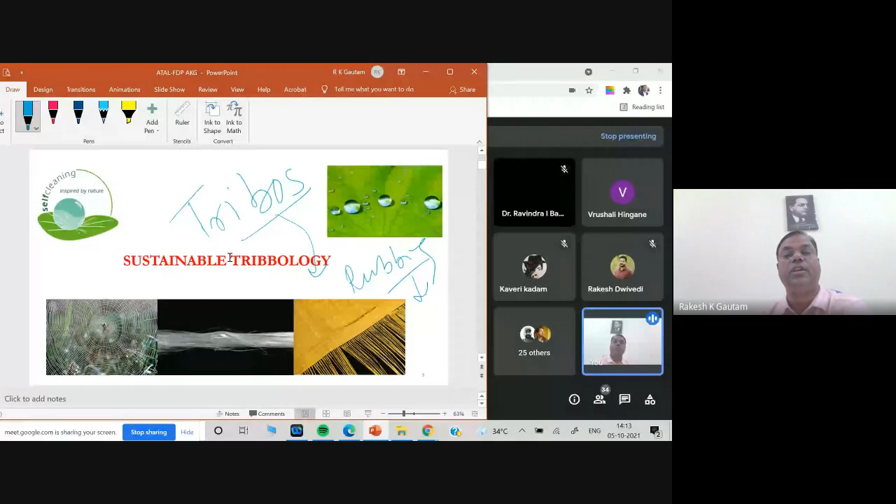Before starting sustainable tribology - why is this term sustainable used for us? Why are we more concerned about sustainability nowadays? Everybody is talking about sustainability, not just in one topic. For example, I am working in composite materials - what kinds of composites can we develop that can be sustained in our environment and used in our general life? So why is this kind of sustainability required?

The first and most important thing is energy, because a lot of energy is required to run this universe. So how much energy do we require to run this universe? There are several kinds of things and objects that can be sustained in our general day-to-day life. Energy is required for every moment of life. I'm talking because I have energy, and I can talk for 2 hours because I have energy. So from where can I get this energy, so I can keep myself fresh and talk in a similar manner for 2 hours? We have to record the energy.

Nowadays we are talking not only in terms of economics, but in terms of economic, social, and environmental dimensions of human development. So not only energy - suppose we can make an alternative fuel. At the place of petrol, we can use hydrogen gas. How can we derive hydrogen gas? How will it be useful to our environment, and how will it be useful to human development? This is sustainability.

Energy services are essentially input to our economic activities while improving living conditions and environmental quality. We will not see only if our GDP is increasing, but the condition of the people is going to the worst. So there is no use of a high GDP if the country's condition worsens. This is very much required - how we can contribute to social development through education and public health, and help meet basic human needs like food and shelter.

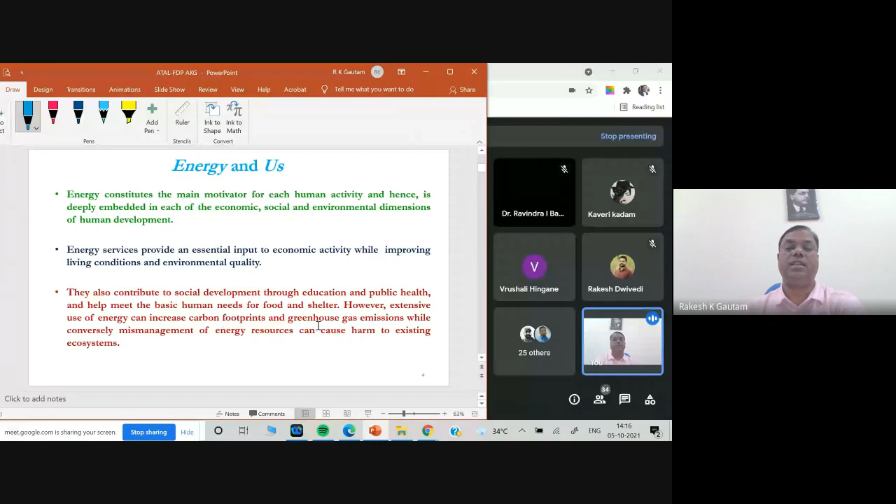However, extensive use of energy - one important thing besides social and environmental dimensions - is that extensive use of energy can increase carbon footprint and greenhouse gas emissions, while conversely mismanagement of energy is a problem too. It is not our purpose only to increase the resource of energy; we also have to control this energy. Suppose excess energy also creates emissions like carbon footprints and greenhouse gases. We have to take all this into account.

So what kinds of gaps are there? In environmental and human development issues, a lot of gaps exist - either in terms of studies or in terms of awareness. It may be of several kinds. So how can we bridge this gap between our desire for energy and the adverse environmental effects produced by our designing? How can we do it?

Particular kinds of designing are very important - how we can design particular components or particular kinds of equipment, all these things are very important. Designing machines that can still meet societal needs while substantially reducing our dependence on fossil fuels and energies. We can develop such kinds of designs which can be used for reducing our dependence upon fossil fuels, because nowadays everybody is rushing for renewable energy. So what kinds of renewable energy do we want?

The prime aspect of this is reducing the inefficient systemic losses through friction and wear, which reduces the performance of machines. Sometimes, when developing any technique or materials, it is also very important to see what kind of process we can optimize - there is an optimization of the process. Process means we have to make several kinds of big machines, and these machines undergo relative motions, and these relative motions produce several kinds of friction and wear. So how can we reduce and optimize these things? Once we restrict the losses of energy, obviously things will improve.

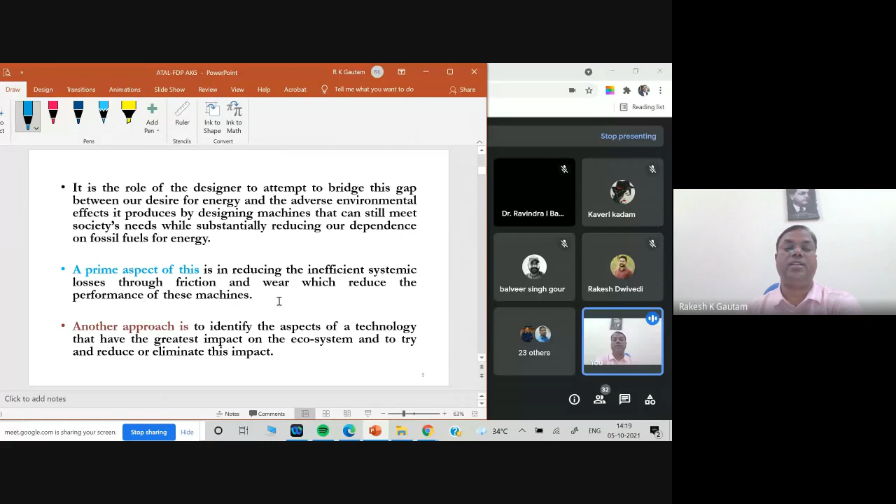So there's LCD, then LED, LCD. Nowadays soft screens are there, you can fold the screen and things like that. So what is it? These are the technologies, and we have to improve in several ways.

So just before that, green tribology, sustainable tribology - these are the issues. So what is required to take care of?

What I am going to deliver, I'm not going to deliver any kind of research, but there's a lot of possibility for research. If anybody is doing research in the area of green tribology or composite materials or anything else, it may benefit you. But I'm not going to deliver my results or my data. I'm just proposing this to you so you can explore the area. I am also just learning the subject, and by studying this subject I am also exploring a few research areas nowadays. So this is useful to everyone. Don't take it otherwise - I am not showing any results, and we are not necessarily producing the same thing.

So what are the environmental and societal issues? There are a majority of issues, but we can categorize them in four major ways. The first issue comprises the destruction and loss of natural resources.

We want energy, so what are we compensating for that energy? We are compensating by destroying forests and destroying resources, and everywhere we are exploring and extracting everything. Suppose we get a resource like oil - then everyone starts drilling in the sea. So this leads to the destruction of natural habitats, aquacultures and biodiversity losses, erosion and soil damage.

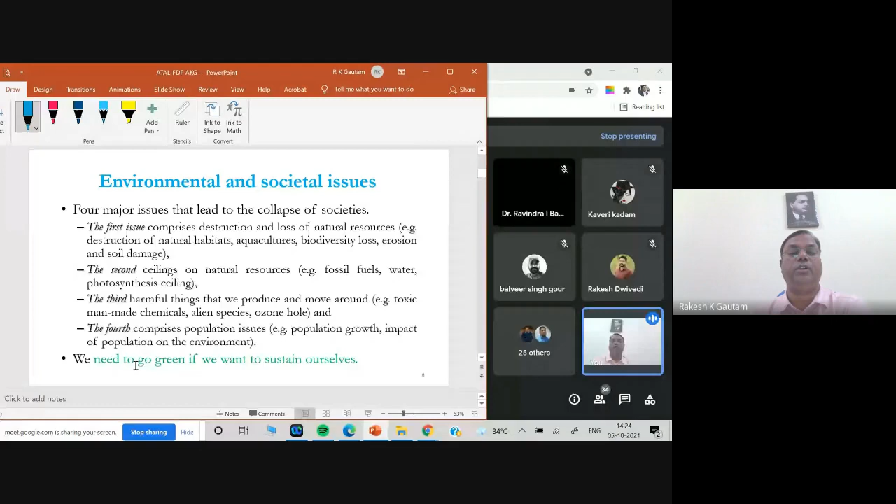So a committee was formed, called the Millennium Project. The Millennium Project was initiated by nearly 50 countries all over the world.

These 50 countries were very much concerned about sustainability - how we can sustain our countries, how to sustain the world. So 50 countries formed a group.

That project was known as the Millennium Project. It is still continuing, and they decided on some major areas.

I will not take the exact reference right now, but it was available. They identified 15 global challenges facing humanity.

All the technology we are discussing is for humanity. We are facing the pandemic of corona, and everybody has challenges to life. Whether developed, developing, or poor country, everybody faces the same problem.

If the problem is there, how can we sustain? For sustainability, we have to develop ourselves.

This Millennium Project was developed in 1996. They chose particularly 15 global challenges. The first one is sustainable development and climate change.

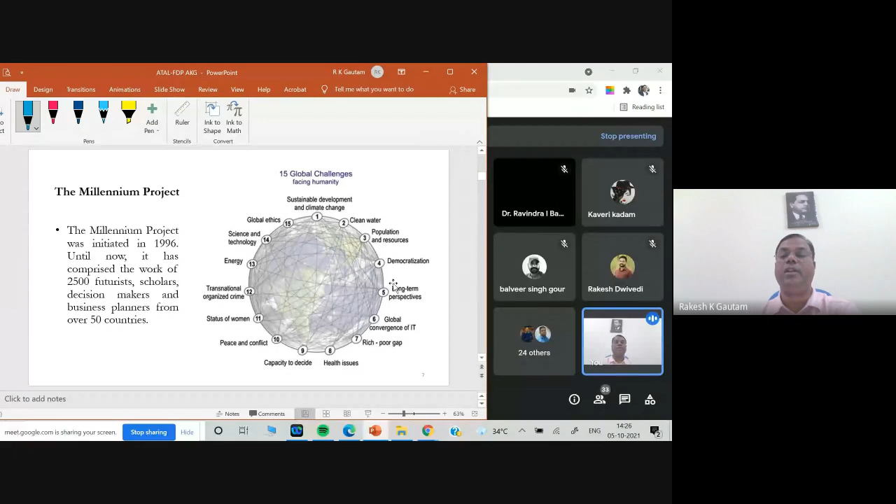That was the concern - how sustainability is very important. These countries were very much concerned about these things.

Now we have alternatives - wind and solar power are increasing interest of society due to their prospect as environmentally friendly sources of renewable energy. What else can be done? Saving energy resources and reducing the impact on the environment are most important for sustainability.

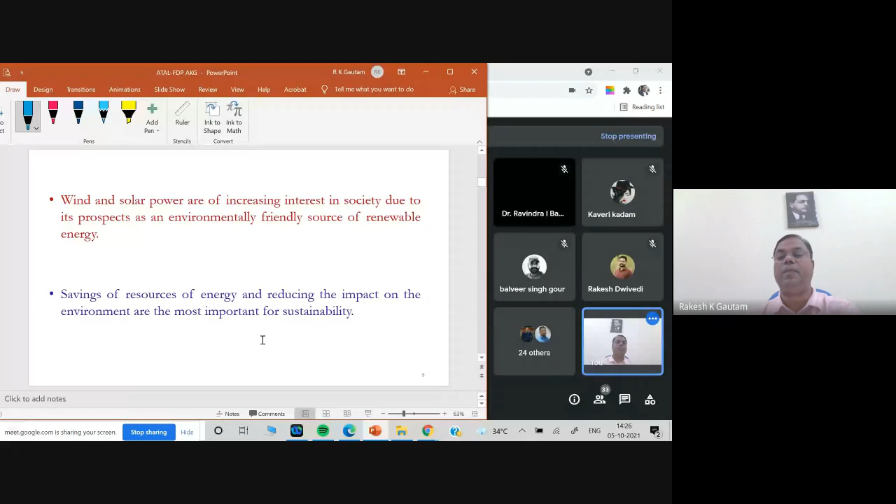We are not going to cover all these 15 global issues. We are going to focus on sustainable properties for green tribology.

Now we are coming to green tribology - the new concept of green tribology. Are you familiar with the term tribology now? As I told you, tribology has three terms.

These three terms are called tribos. Tribology - tribos means rubbing. So wear, friction, and lubrication are the three areas of this subject.

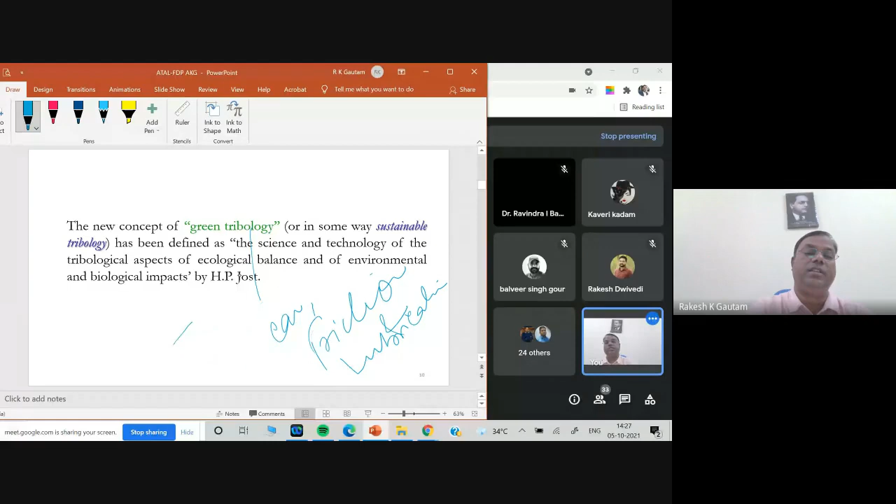So this term is sustainable tribology. What is this term - green tribology or sustainable tribology? How can it be sustained? It has been defined as the science and technology of the tribological aspects of ecological balance.

As we discussed, ecological means eco-friendly balance of the environmental and biological impact.

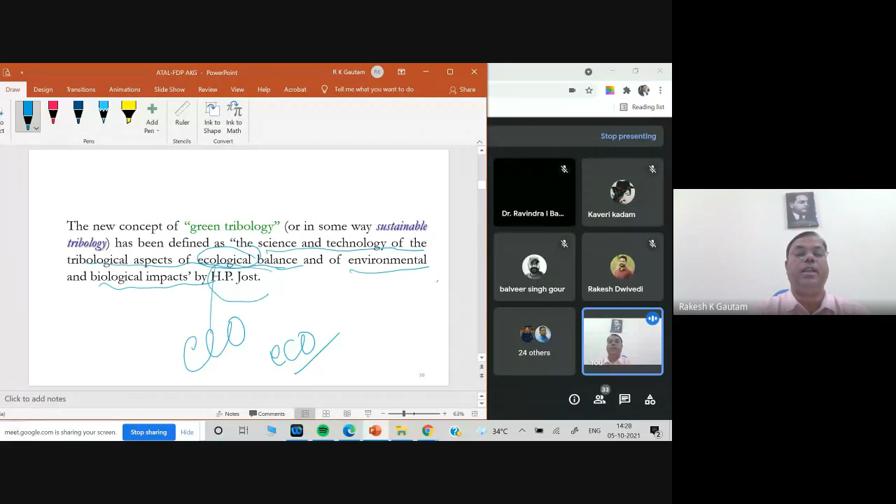As we mentioned, this subject is very old, but it got recognition very late. Now tribology has been recognized.

The person from the UK, H.P. Jost, actually ignited people and raised awareness with the governments of UK and US.

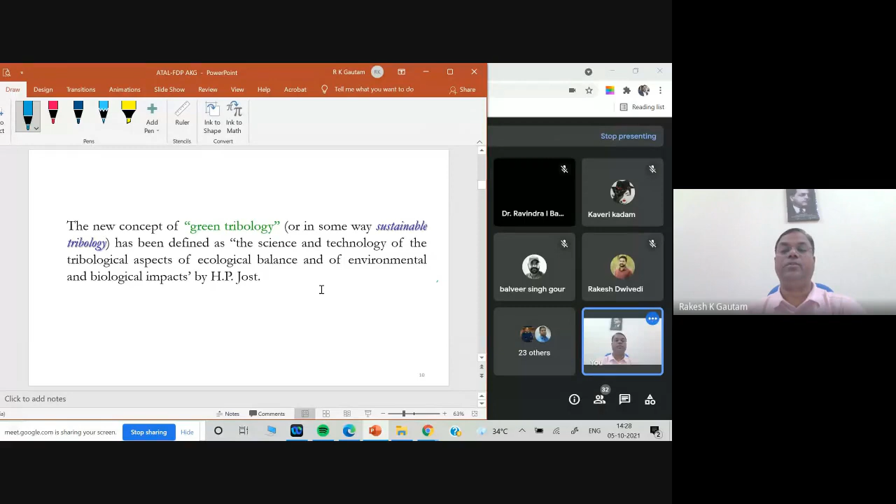He showed that through such studies, you can change the ecological system as well as the environmental and biological impact. I will come to his report.

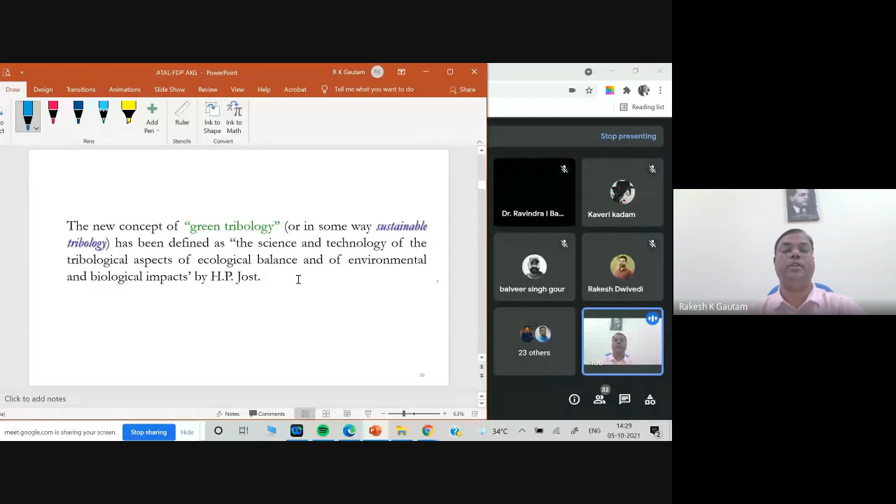He gave a report that is very renowned, known as the H.P. Jost report for tribology. All tribology people are very much thankful to Mr. Jost for this.

So how is this sustainable tribology - we can say global sustainable development. How can this globally be sustained? How can tribology become an important part globally? Just look at this - energy saving, how we can save energy.

There are 12 principles of green tribology, the sustainable tribology. I will discuss them one by one. I'm coming to them in a few minutes.

The sustainable tribology involves environmental benefit - how energy can be saved, how the environment can be benefited, how the cost can be reduced, and how social progress is achieved. This subject can be viewed this way. Every subject, not only sustainable tribology but tribology in general, faces such challenges.

So what are the energy saving sources? What are the benefits of this environmental effect? And how can we reduce costs using any kinds of technology or technique, to make it cost effective? We may have a technology available, but still we cannot use it.

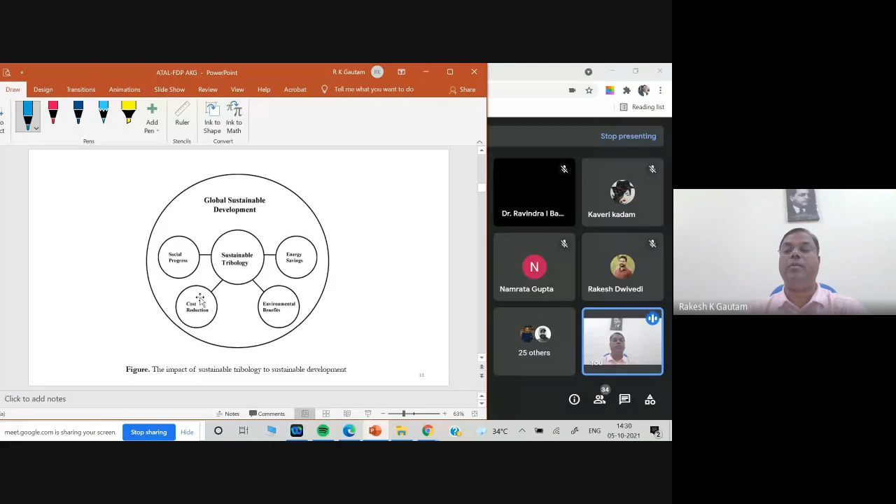Why can we not use this technology? Because it is very costly. If it were cheapest, then it would be available to all. So what should our purpose be? The technology should be designed in such a manner that it may be available to all. That is our aspect of social progress in life.

So also we can see here the chain of sustainable tribology. We can say it is quality - quality means how we can make quality so that a person or component can be sustained for a long life.

There is low wear rate and surface damage, in low friction, in high friction. Sometimes we require low friction - suppose the dissipation of energy is very high, in that case there may be more energy losses. So what do we have to do? We have to require low friction.

So by reducing heat generation, long life will be there, so we get less maintenance, repair, and downtime. I'm not just going into one topic, but this is important for any industry - any kind of production unit suffers with downtime.

Downtime - are you getting my point? Downtime plays a very major role in any industry. Downtime means suppose you have a component of a machine, and that machine is going to get damaged very frequently, requiring a lot of repairment. So how many times will this machine be idle? It will not work for a very long time - that time is basically called the downtime.

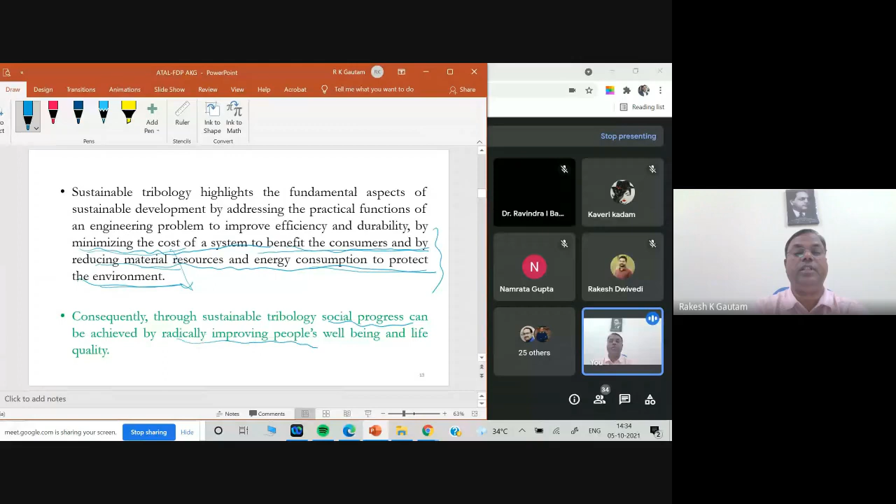So these 5 things we have to derive, that can be environmental, economical, energy, and the quality aspects.

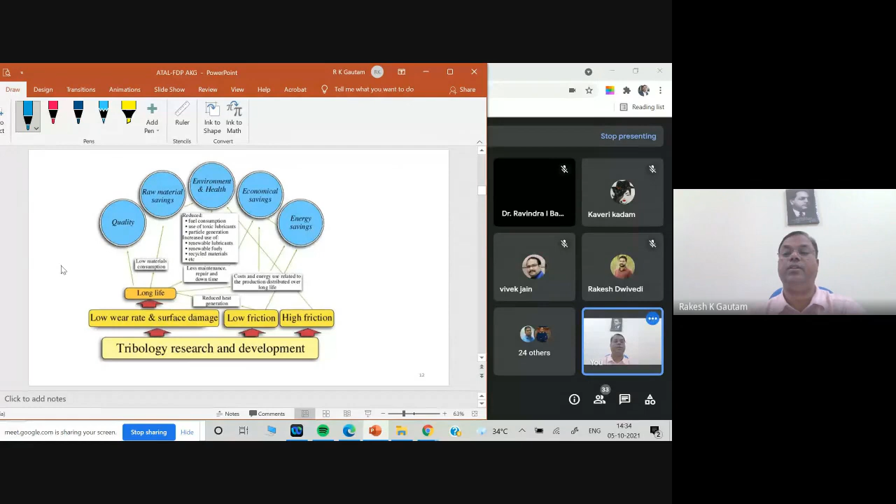I don't know the protocol of the presentation, but you can interfere in between if you wish. Here we have to discuss the term H.P. Jost. This Jost is the person who gave a report in 1966. You can imagine this is not a very old time, just 1966. Jost gave a report, which is renownedly known as the Jost report.

The Jost report, he wrote a book covering every aspect from the machine component to the live component, how tribology can be used. This report was not only kept with him, he popularized it with the government of the US, UK, and everywhere.

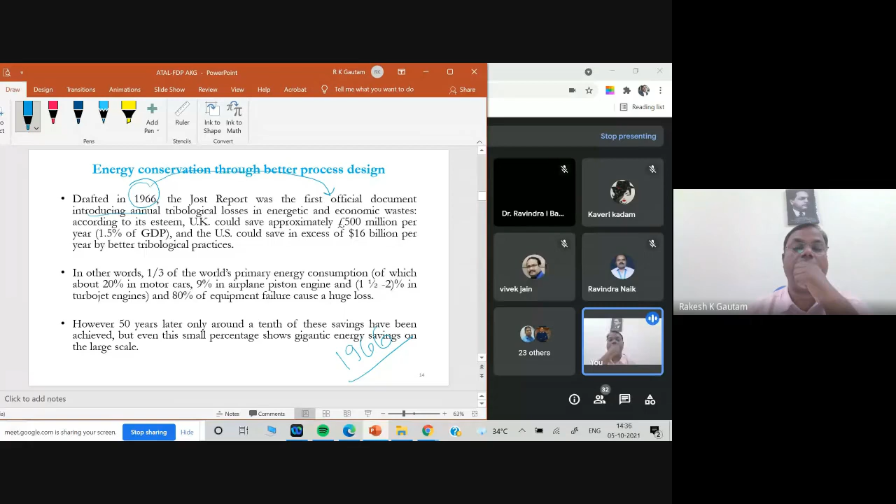So what we find: the Jost report was the first officially documented introduction, and that report became the official document for other countries—US, UK, and all the European countries, and Singapore—they had to keep their report, and this became official and mandatory.

So for any kind of industry or office, they have to take care of this Jost report. He introduced what is the annual tribological losses in terms of energetic and economical waste, meaning energy losses as well as economic or money losses.

According to its estimate, UK could save approximately 500 million pounds per year, meaning 1.5% of the GDP. Just one technology and one set of suggestions can improve the economy of a country by 1.5% of GDP. And the US could save in excess of $16 billion per year through better tribological practice.

That is the reason governments made it mandatory in all offices. So you can see, in other words, one-third of the world's primary energy consumption is consumed by this one factor only.

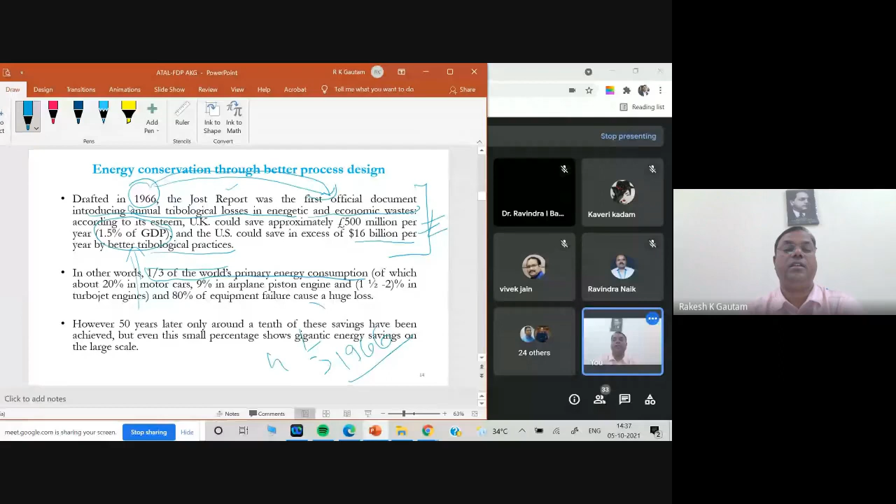Of the primary energy consumption, about 20% is in motor cars, 9% in aeroplane piston engines, and 1.5 to 2% in turbojet engines, and 80% of equipment failure causes huge losses.

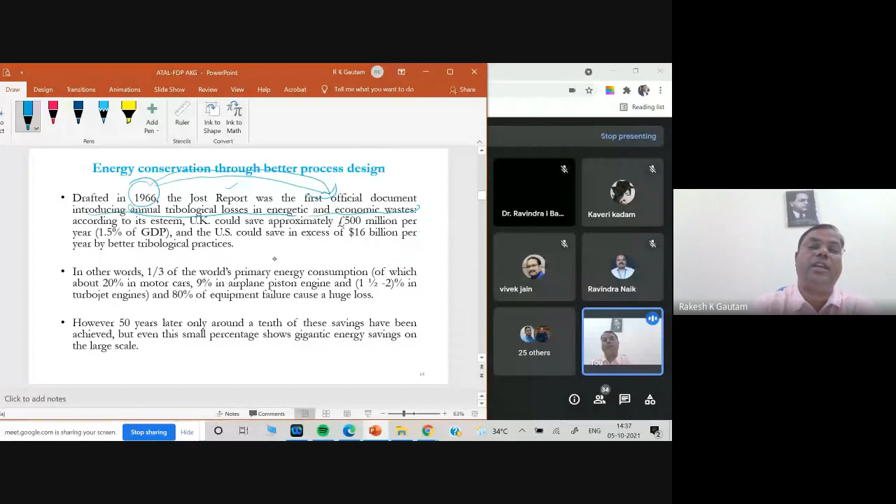You can imagine any component—suppose you are running a machine or a vehicle, and it is not maintained, not serviced in time. We think we are saving money, but the component gets damaged over time if we don't maintain it properly. That is why we have to keep things up to date.

It has been estimated that approximately 11% of the total energy annually consumed in the US falls into 4 major areas. We can categorize which areas should be more concentrated on: the first is transportation, then turbo machineries, then power generation, and industrial process.

As I mentioned, sometimes we are not required to generate novel materials or novel kinds of things, but we can produce novel processes instead. This novel process itself is very efficient to reduce costs, meaning improve our economy.

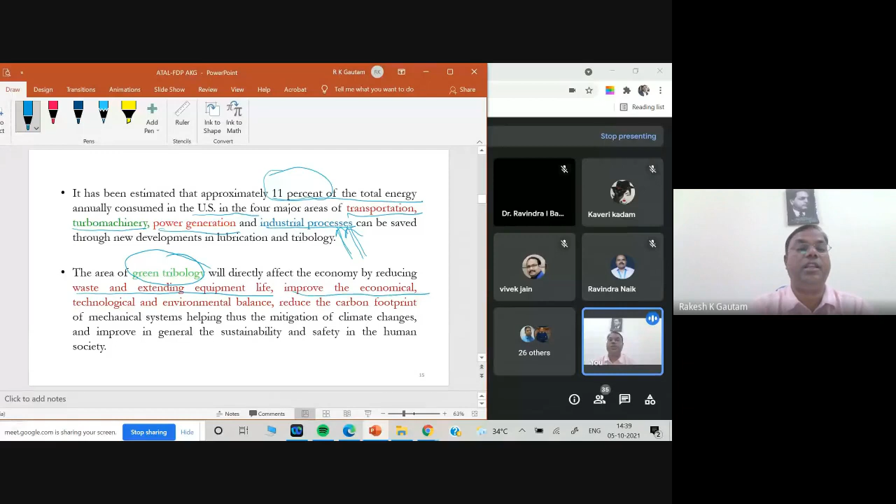So these 4 areas can be covered in green tribology, directly affecting the economy by reducing waste and extending equipment life, improving economic, technological, and environmental balance, reducing the carbon footprint of mechanical systems, helping mitigate climate change, and thus improving the general sustainability and safety of human society.

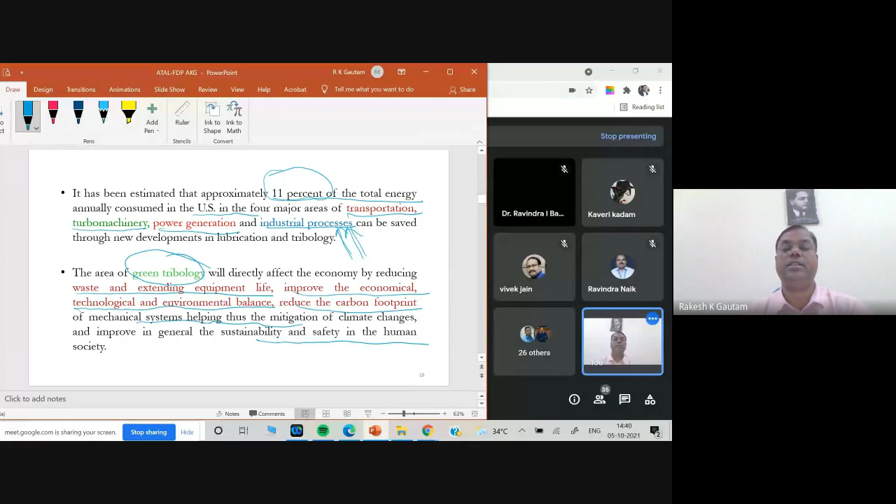So this one is the very important terms, the green tribology. I think you have understood the meaning of sustainable, green sustainable, all such kinds of things. So either we are calling it sustainable or green tribology.

So this green tribology includes the technology that mimics. Mimics means, just we can say mimic, we say mimicry. Mimicry means copy of the one person by another person. That is a mimic, a mimicry.

So it mimics living nature, that is biomimetic surfaces. So how can something be eco-friendly, we are calling it mimics. Everybody is familiar with mimicry, we do mimicry of something. So we don't have to do the mimicry of any other person. So what is the environment? What is the means of natural given things available around us? So can we mimic that?

So this mimic living nature, the example I had written, let's come to the point. Mimic the living nature, living nature means whatever is a live kind of thing. So all technology or any kind of design does not come to any scientist's mind suddenly. Suppose like Newton, they say he just realized why this apple is coming down only. So Isaac Newton made some kind of sense of this, and the gravitational force effect was discovered.

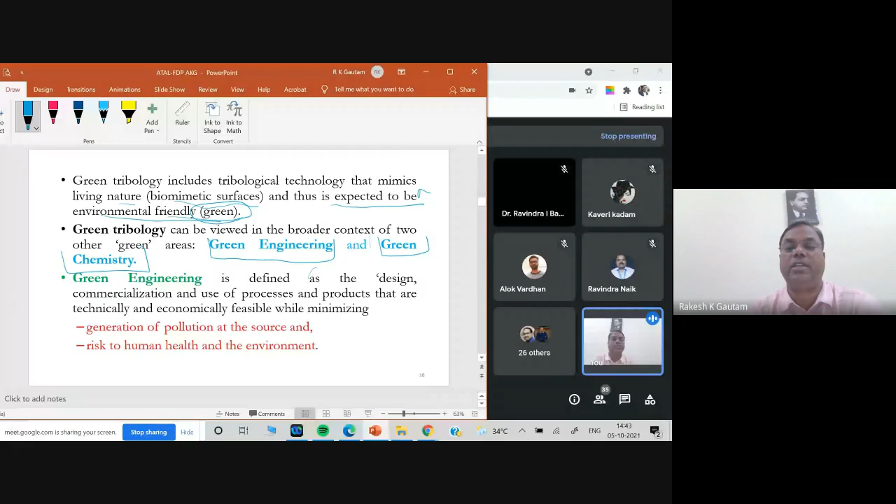So green tribology can be viewed in the broader context of two green areas. Which two green areas? Green engineering and green chemistry. We are not going to cover green chemistry here. As I told you, green chemistry, green production, green manufacturing, anything which is eco-friendly is called green. So here green engineering is defined.

How can we define it? The particular term is design. Design is not a very simple term, it has a very significant meaning. So it is the commercialization and use of processes and products that are technically and economically feasible while minimizing generation of pollution at the source and risk to human health and environment. So that will be very much used for this.

So these are the three tiers of green engineering, three tiers or three stages of green engineering to assess the design involved. What is the design? Process research. How do we define this green engineering? This green assessment can be defined by the design involving process research and development, conceptual and preliminary design, and detailed design, pollution prevention. What is the process? Heat and energy integration process and mass integration.

We will now define green chemistry. It is defined as the design of chemical products and processes that reduce or eliminate the use and generation of hazardous substances. Regarding green chemistry, we didn't mention that nowadays people are using a lot of processed food.

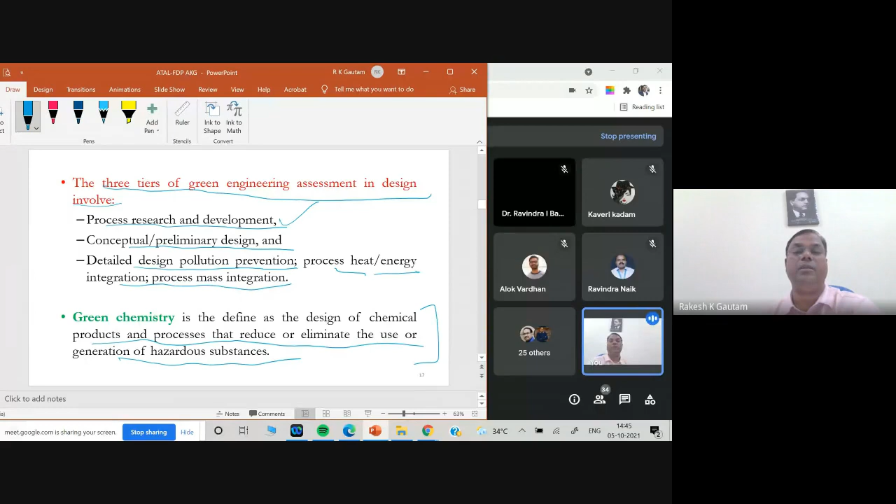There are basically 12 principles of green tribology. These 12 principles cover a very vast area, so I am not going to cover them one by one, but we will cover two broad areas and see what is meant by this.

So the first is minimization of heat and energy dissipation. A lot of components experience heat dissipation, and due to this heat dissipation, sometimes the component fails or goes to failure. These are very costly losses that cannot be compensated.

So what do we need to do? How can we minimize wear? Wear means the loss of material that happens during heat dissipation. When two components are sliding against each other, a certain force is responsible for causing damage to the components. So these things need to be optimized - wear should be minimized during sliding, impacting, and movement of components.

Next is reduction or complete elimination of lubrication, and self lubrication. This part about lubrication means - sometimes chattering happens between two components, like in a gear. Sometimes oiling is involved, and heat may be dissipated due to such things. So we need to check what possibilities are occurring - is heat dissipating? This could be an adverse effect, or it could be a favorable effect. We have to check it.

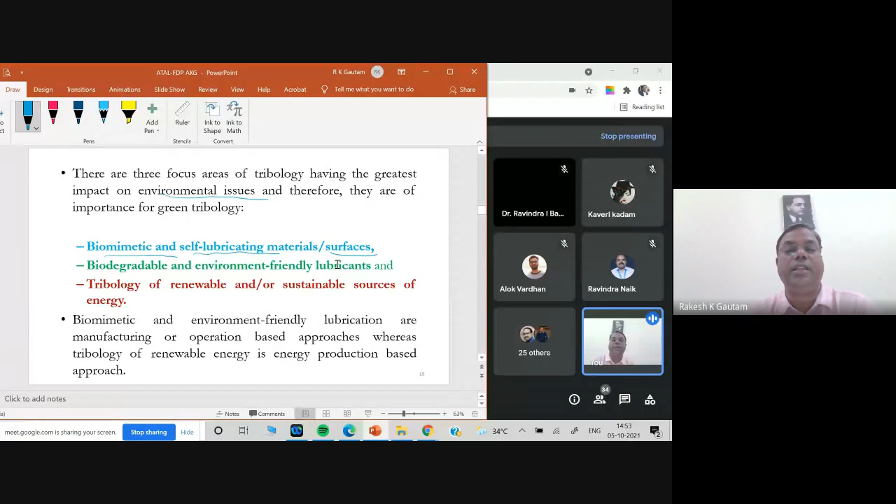So biomimetic self-lubricating materials, another is biodegradable or environment-friendly lubricants. Tribology of renewable and sustainable sources of energy - but we will cover this only.

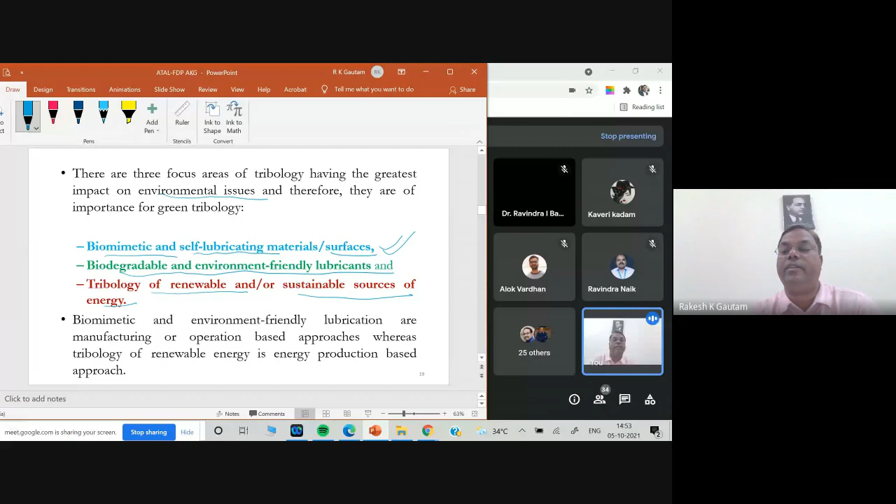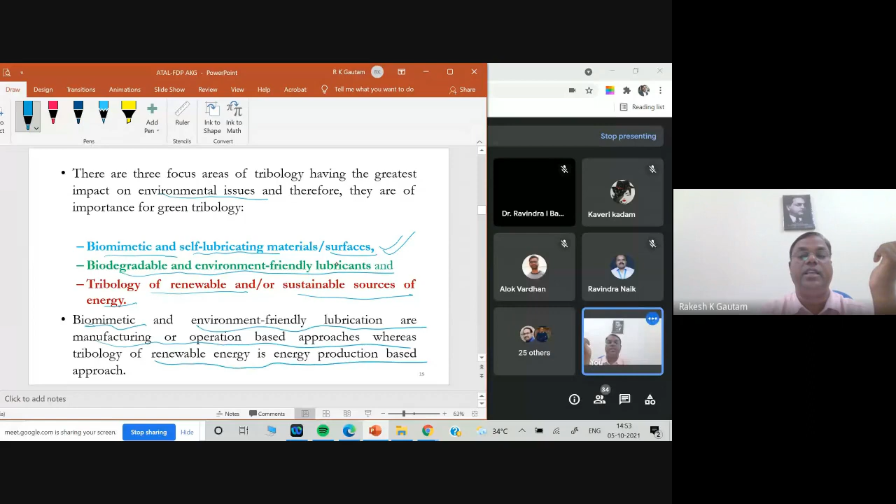So what is the meaning of biomimetic? I am coming to biodegradable and environmental friendly. Biodegradable means what kinds of plastic we are using - polymer is there - and tribology of renewable and sustainable sources. So this biomimetic and environment friendly lubrication are manufacturing or operation based approaches, whereas tribology of renewable energy is an energy production based approach. So these are the two things.

Now what is biomimetic and an example of biomimetic? Bio means living things, we can say, and mimetic means we can make a copy of that technique, that structure.

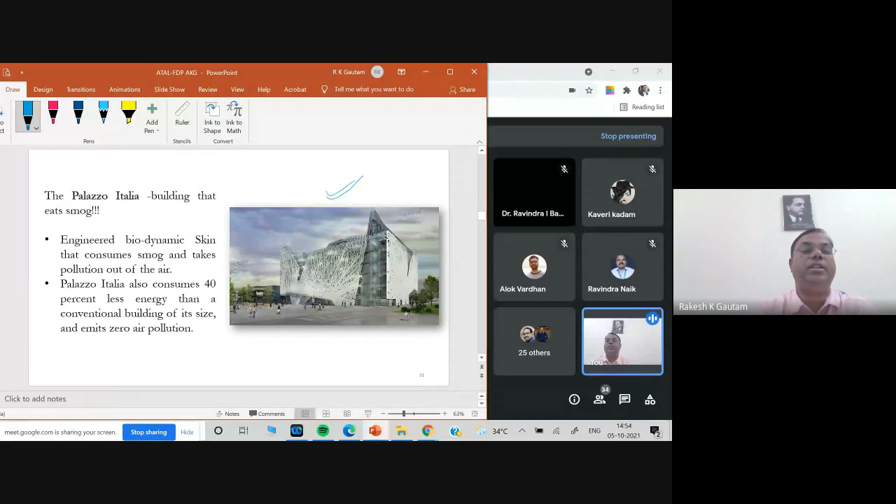So by using biomimetics, you will find a building has been made - reference I forgot to write, but this building is made in Italy. This building is called Palazzo Italia, and that Palazzo Italia building eats the smog.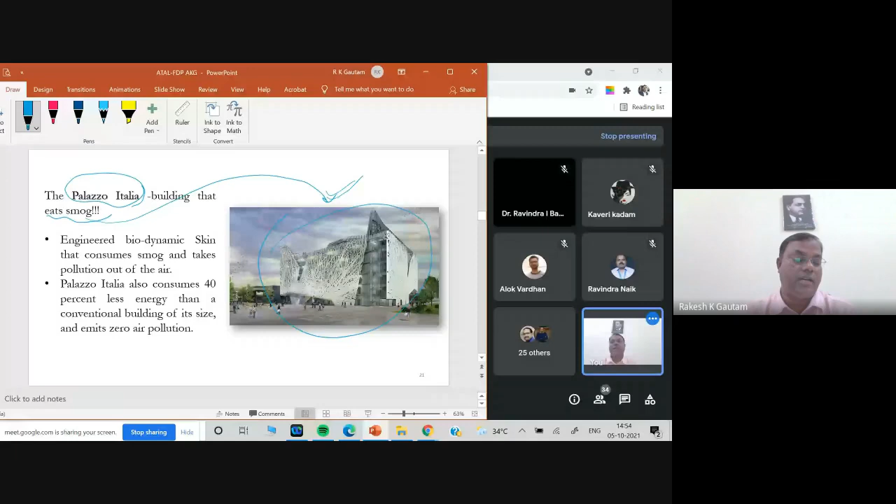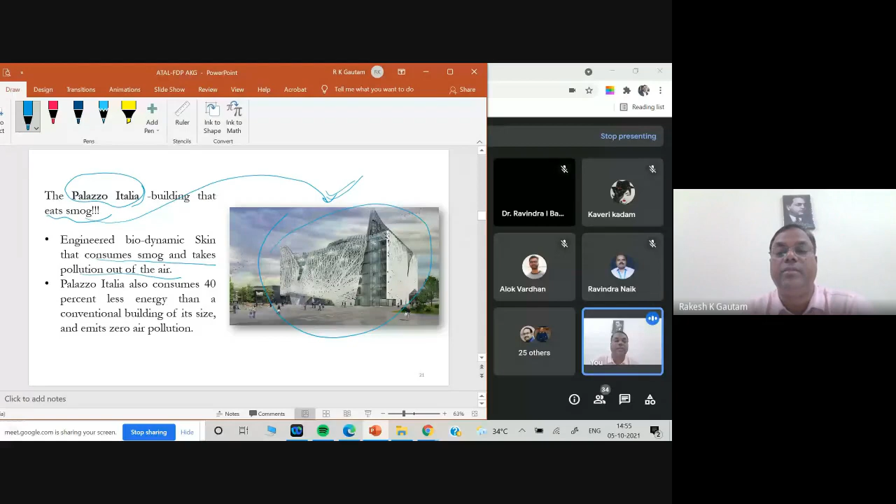Smog means some kind of carbon footprint or other things that can be around the building, so it can be soaked and it can be refined as well. This engineered biodynamic skin consumes smog and takes pollution out of the air. So they have generated this building, completely made of glass in structures of steel, and they have made this particular design.

This particular design is like the plastic basket we used to have, with a handle. So they have to make the structure - several kinds of structures are there. In those structures, as we will study, we can make anything. Suppose this can have more strength if we provide support here, and again more strength if we provide it here also. It can be provided further once we have to add more.

So finally what happens? Natural fiber structures, whatever we are making nowadays, are based on this principle. So we try to make cavities as small as possible, and we also have to make some kind of sensor that can sense carbon particles. This carbon particle can be soaked up by the building - that is smoke eating. They develop this all over the building, around all the buildings. This is a very good example of an energy-alive building.

The Palazzo Italia consumes 40% less energy than a conventional building of its size and emits zero pollution. Suppose such a vast building is there, there may be several ACs, several kinds of instruments, several components, several UPS - all these things will be there. Whatever energy they dissipate and consume, it's only 40% of this one. So they emit zero pollution - they are not emitting any kind of pollution.

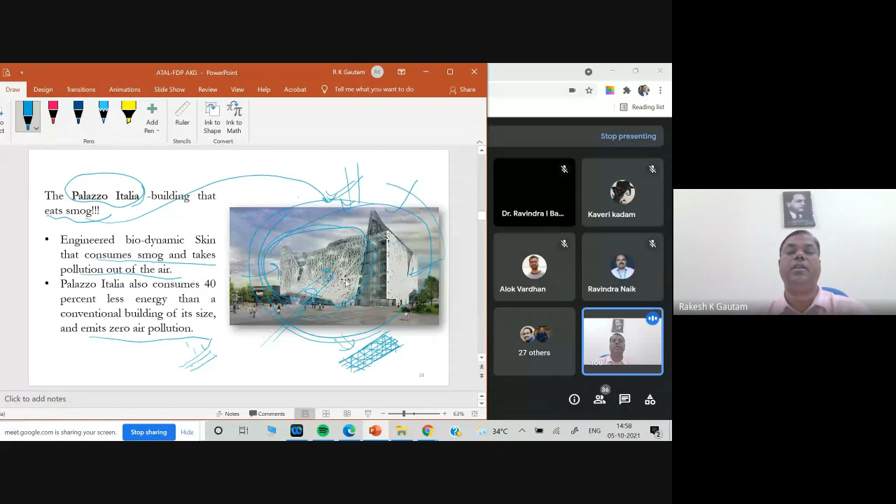We can see several kinds of components that have been experimented with, and how they can soak up particles. So similar structures have been developed around this one - they can naturally soak the smoke, these carbon footprints. That is the reason it's called biomimetic - it's inspired by our environment only.

So biomimetic materials are also usually environment friendly in a natural way, since they are a natural part of the ecosystem. For this reason, the biomimetic approach is particularly promising in tribology. In the area of biomimetic surfaces, a number of ideas have been suggested. You can see over here.

I think everybody is familiar with the lotus. Lotus is a very beautiful flower, but we are not bothered about their leaves. Their leaf has a very good quality, very good structure, and that has super hydrophobicity.

Super means they have a very good property of hydrophobicity. Hydrophobicity means water repellent or water absorbent - both conditions may be possible. This is one of the best examples of a surface which can be water absorbed as well as water repellent, once we have to keep this one.

So what is the reason for this? Scientists are trying to explore it. So what did we study? The surface - all the study over the surface comes under tribology. So tribologists think about what is the structure of this lotus leaf which is responsible to show such super hydrophobicity. So what structure did we find?

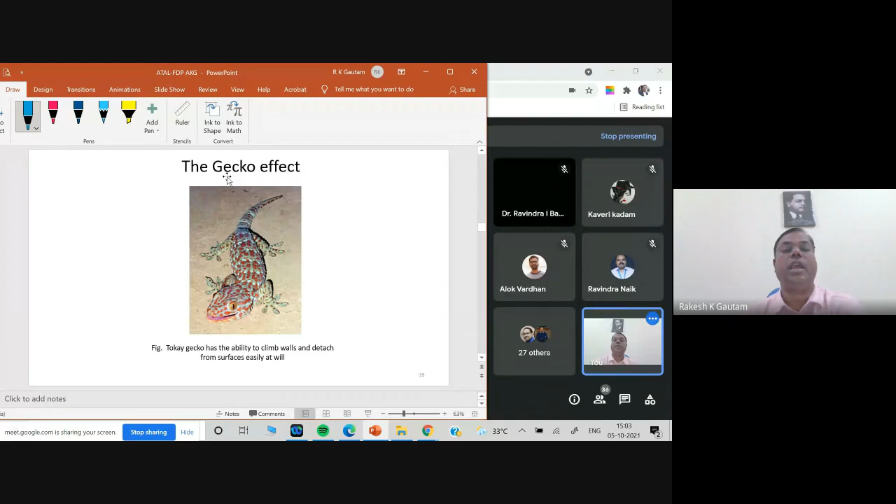We are all familiar with lizards, and this is called the gecko effect. What does gecko effect mean? This is a very good structure-property relationship showing how this beautiful lizard can climb up a wall and come down without falling. There is a reason for this, and scientists try to replicate it. So what are their surfaces like? How are these surfaces structured, and once we try to make such a structure, what do we have to observe?

They have observed there are very fine kinds of structures, fine patterns like this one in these structures.

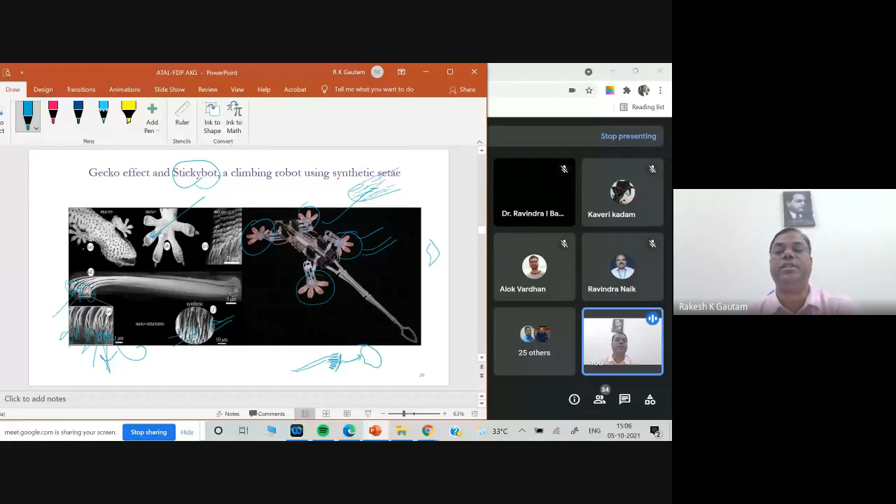So by reverse engineering, this is biomimetic. By this one, suppose if we are able to generate such kinds of things, what will happen to us? The people will start climbing on the wall? No. So that technology can be used for several things there. Several things we can stick, we can wall, and a lot of things. And so we can create these structures.

One thing is there, just we will observe, and we are all very much familiar about the shark. Shark is a very vast fish, and it is also a very dangerous fish in the sea. But it is very much dynamic. It is very vast, and it is very dynamic.

The reason of the dynamic is there, their skin structure. They can make any movement at any angle at any time, and that is the reason. Meaning if a shark is there and another fish is there, the shark can make more kinds of dynamic effect comparative to the other fish. That's the only reason.

So they have specific kinds of patterns over their surfaces. So what can we do? Suppose in such kinds of skin, if you can generate it in a few components, suppose in case of an aeroplane, or any other kinds of things where we have to record dynamic kinds of motion, so they can be used very fast.

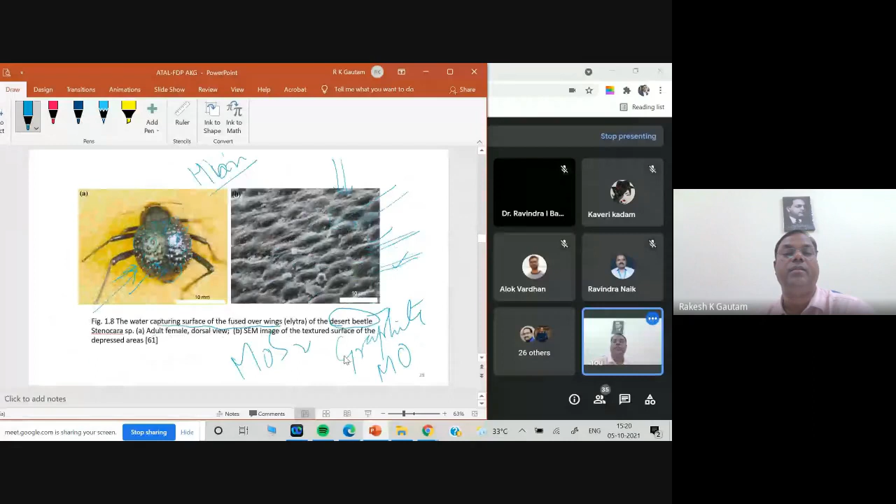So we can make reverse engineering of all these biomimetics. Some other examples are also there, but we can use reverse engineering to improve our life. So what are the challenges of this sustainable tribology, or green tribology? This is a very new field of green tribology, so there are a number of challenges. What are the challenges?

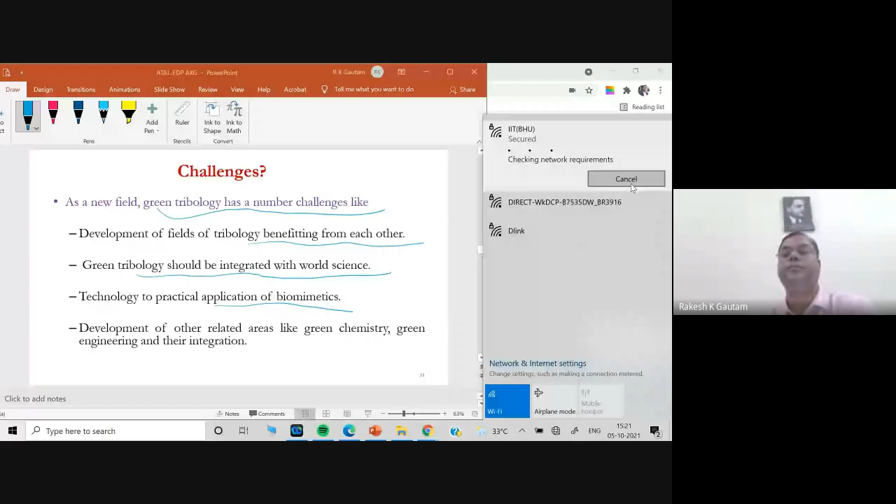So these are the challenges of sustainable tribology - development of related areas like green chemistry and green engineering and their integration, how we can collaborate engineering with chemistry. Chemistry is also very important. Chemistry doesn't just mean reactions, organic or inorganic chemistry. Chemistry means such kinds of effects - meaning we are making toxic and non-toxic things.

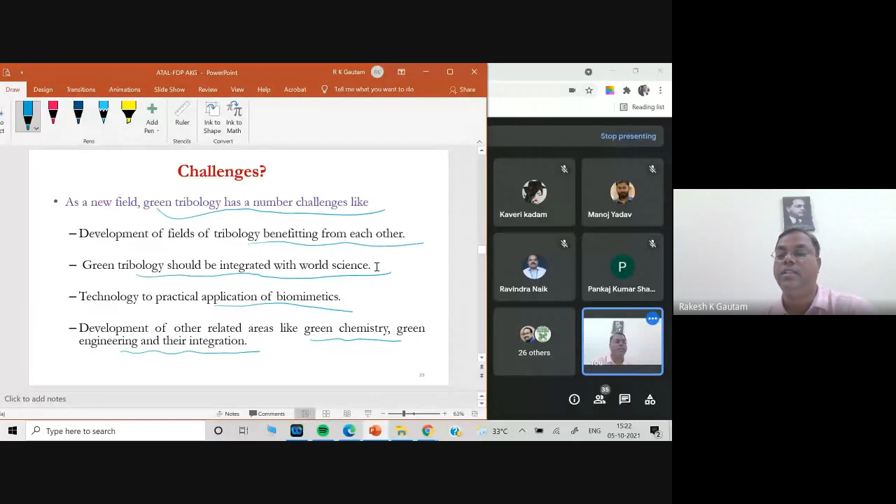Then another part is texturing. We have seen examples of texturing - we took a biomimetic example and showed texture. All these are beautiful textures like this one, and this is also a very beautiful texture. So what is the meaning of texturing?

Texturing means surface treatment, either to improve tribological performance. This texturing is nowadays very much used in manufacturing technology - in rolling, sheet metal, milling - in all these places it is used. I will introduce this briefly, but this is a very good area to explore for research.

This surface texturing is one of the surface engineering techniques - a part of tribology that regards structural modification by addition, removal, or chemical alteration of materials. So what is the surface? This surface has some constituents, some kind of grain structure, crystal structure.

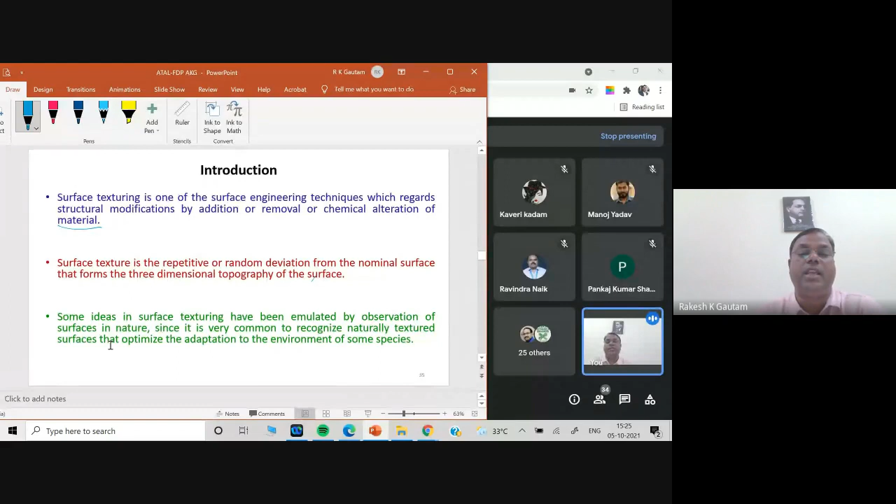So surface texture is the repetitive or random deviation from the nominal surface that forms the three-dimensional topography of the surface. Some ideas of surface texturing have been emulated by observations of surfaces in nature.

As we gave the example just now - why can the shark swim so fast? What is the reason? The reason is this one only - there are separations of the water. Why do these separations happen? Because of this beautiful structure. A well-known example is the patterned skin of some fish that might lead to reductions of drag forces during swimming - it can reduce drag forces through water separation, due to this skin. No other surface has such a property.

And the lotus effect - self-cleaning properties. Self-cleaning property is in the lotus - you will never find a lotus leaf very dirty. It has a self-cleaning mechanism.

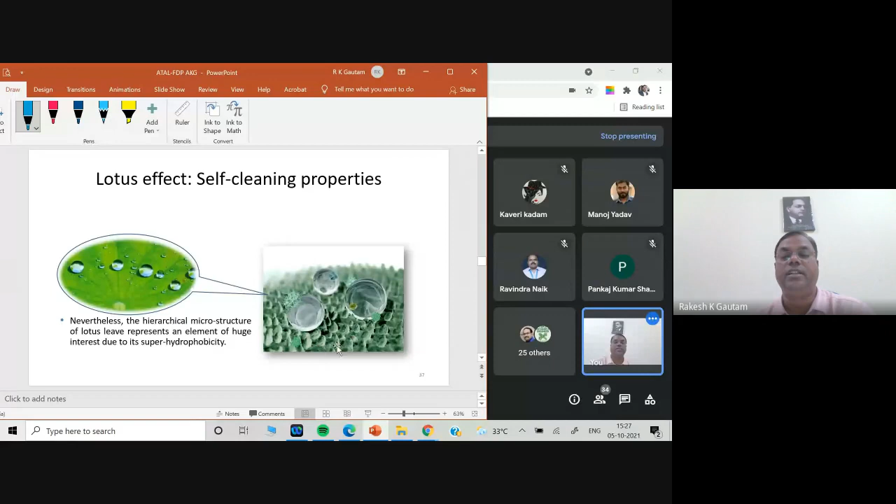So this is self-cleaning, and why all this happens is due to this beautiful structure over the surface. All these are textured patterns, this is the gecko effect. The gecko effect means these textures create a vacuum over the surfaces. We can see this over tires, and either tires or shoes. All these are very beautiful patterns.

But now we are trying to explore this in components of the machine, all these things. So how will this texturing be used?

So this surface texturing, in the present context, is the intentional creation of micro features. We are not talking about the natural ones - natural ones we already discussed under biomimetics. But here, what kind of intentional creation of micro features are we talking about.

Just a minute, I have to receive this call.

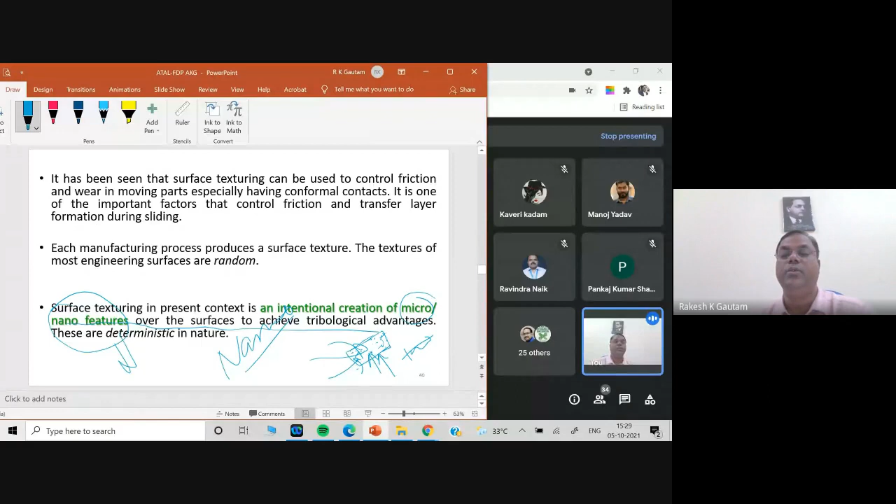Nano means what can we do in nano? Suppose the area is very small, this area is very small. But in this area, if it's micro, what will happen? Suppose we can make porosity of only 100 in that area. But if it's nano, we can produce thousands or lakhs of porosity in the same area. So that can retain more oil, that can retain good surface properties. So that is also a very good use of nano in case of texturing.

So you can see here, texturing on the orifice plate. So on this orifice plate, we have to make a very beautiful pattern of texturing. What is the reason for making texturing over there? So they can retain the oil - the textured surface, and from both sides it is a textured surface.

So in this particular case, what are we doing nowadays? We can introduce self-lubricating materials, not any kind of regular lubricant, because lubricant has limitations - they cannot sustain very high temperatures. So nowadays we can provide self-lubricating materials, suppose MoS2, or such things as hBN, which can sustain very high temperatures. So just by making beautiful pockets over the surfaces, they can retain good properties.

So this texturing, we can say, is part of the piston ring. So now in the piston ring, what do we do? We just have to make very beautiful pockets. There is a liner and a piston - both the liner and piston. So we have to make a very beautiful pattern over the surfaces, these kinds of patterns. So sometimes we have to make pockets like this one, all over the surfaces. So this pocket can retain oil very conveniently.

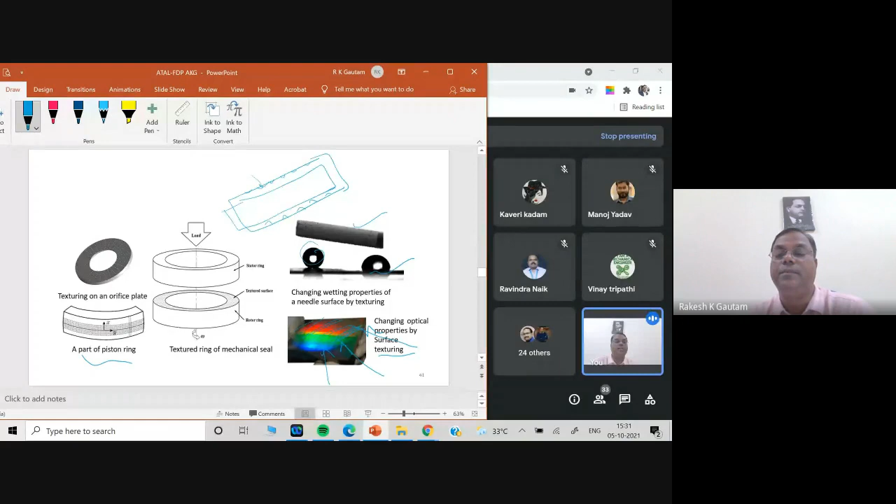So these are the very beautiful patterns of texturing. So here we can see how we can develop dimples for oil, and these dimples can be produced this way. So implementation of surface textures on these parts leads to effective reductions of interfacial friction and wear.

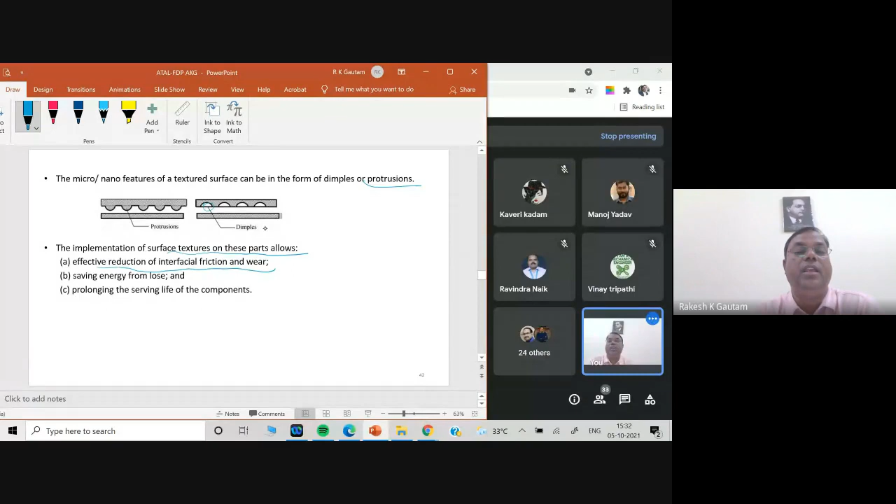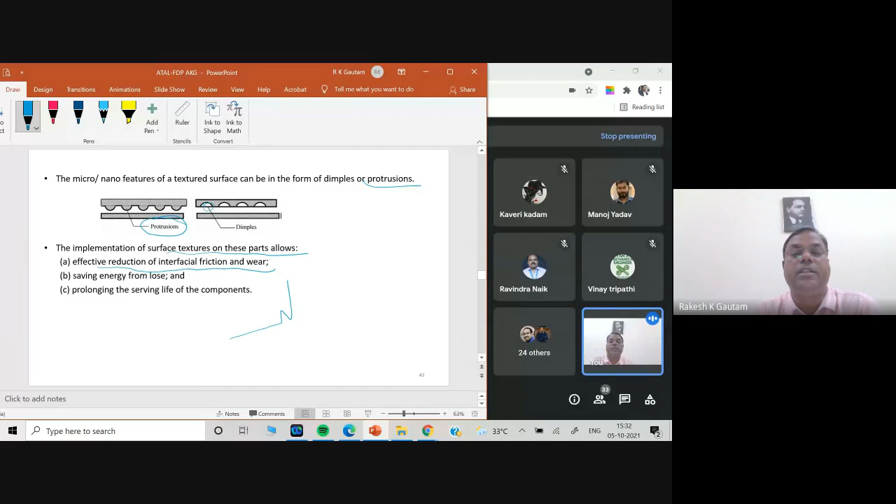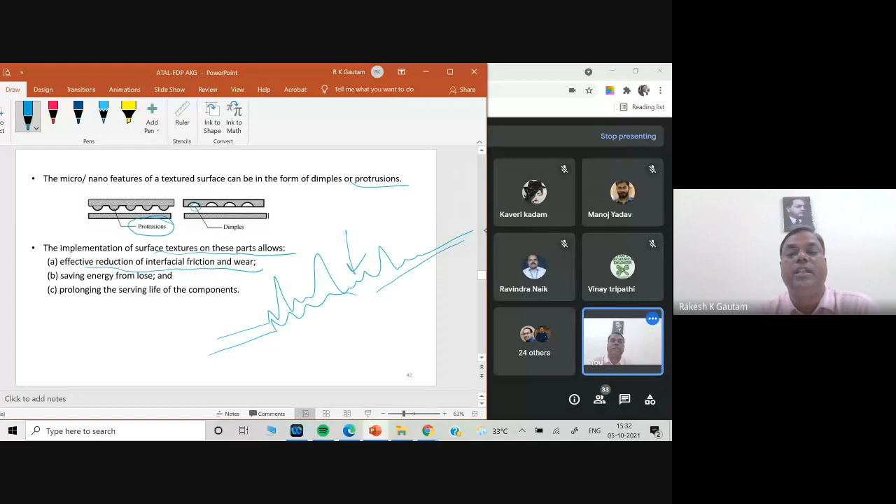And due to this pocket - earlier what we had, suppose, were protrusions. Protrusion means some kind of asperity. What is our surface? The surface has several asperities, and these are very much irregular. Some irregularities are there. Another surface may be like this one, another surface may be barely like this one. So what is the thing happening there?

So these micro-nano features of the texture surface can be formed by dimples or protrusions. Protrusion means asperities. This effect causes reduction of interfacial friction and wear by production of dimples, saving energy.

So just avoiding this, what will happen? Once it comes into contact with the surface, there will be damage, like this, like this. So all these dimples will go, and after a certain period of time, it will make direct contact over the surfaces.

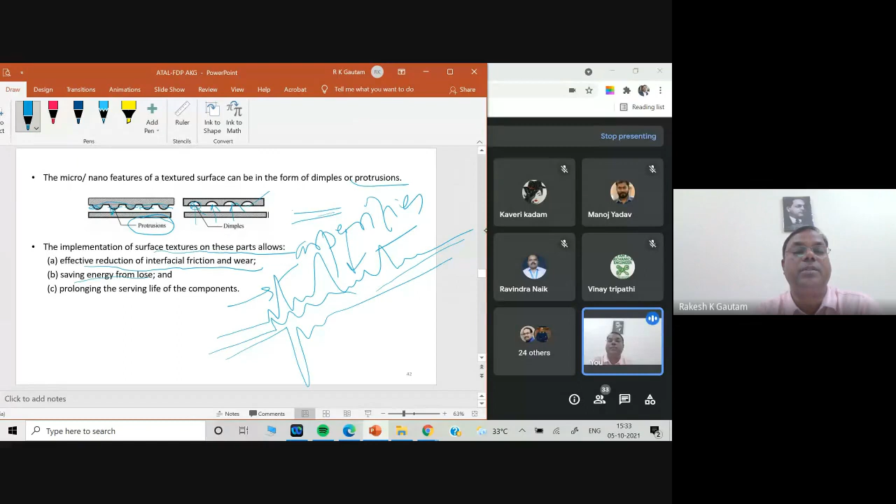So it will damage this. Irrespective of this, people are trying to develop this dimple. So by making this dimple, what will it do to the surface? It will act like a pocket. So this will remain a pocket, and this surface will also remain.

So it will not make direct contact of the surfaces, and this pocket will act as some kind of lubricant, continuously providing lubrication. So this is the use of texturing - saving energy from losses and prolonging the service life of the component. Since self-lubrication is there, it will increase the life of the component.

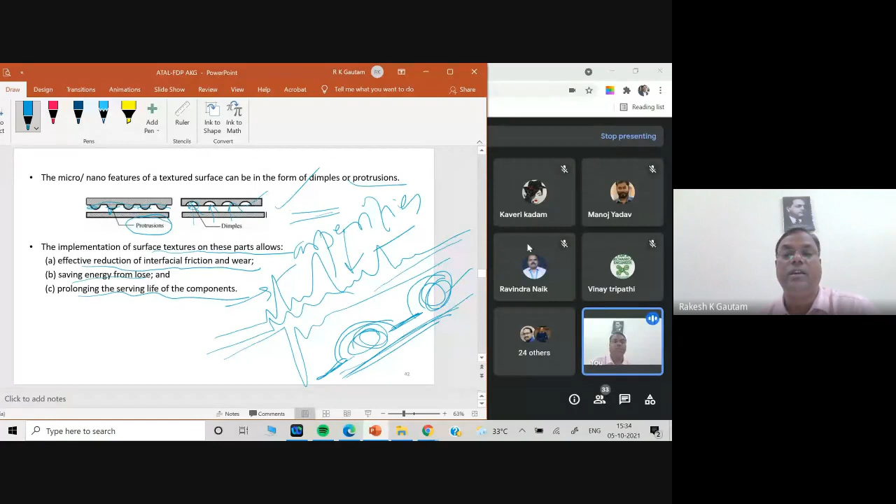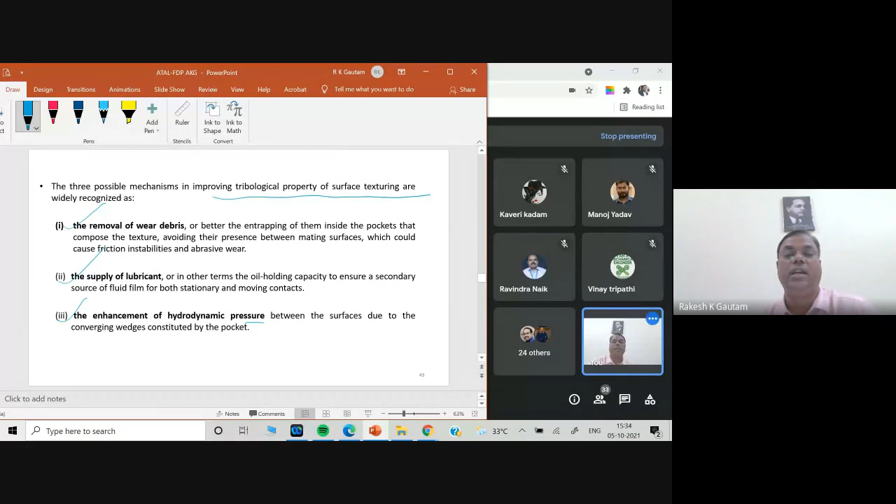So these are texturing examples. There are various mechanisms to improve the tribological property of the surface through texturing - removal of wear debris, supply of lubricants, and enhancement of hydrodynamic pressures. All these are hydrodynamic, hydrostatic ways.

Most widely used surface texturing techniques - what techniques can there be? This is pattern coating. Pattern coating means the same kind of coating repeated - same pattern. Suppose I want to make this pattern.

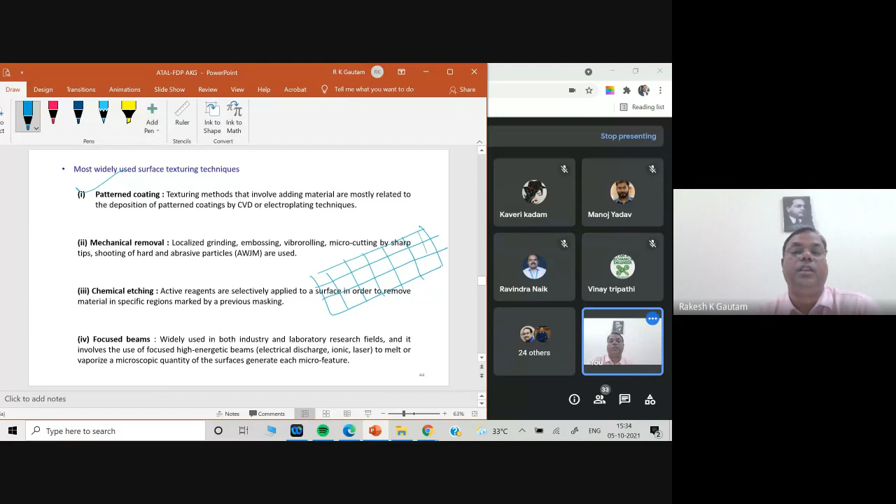What thickness of coating did we make, and suppose you see the thumb - in the thumb there is some kind of impression, and that's a natural kind of texturing given by God. What is the purpose of this? Everybody knows - sometimes it generates more friction, sometimes it has a lot of use. So we can artificially develop such kinds of pattern texturing.

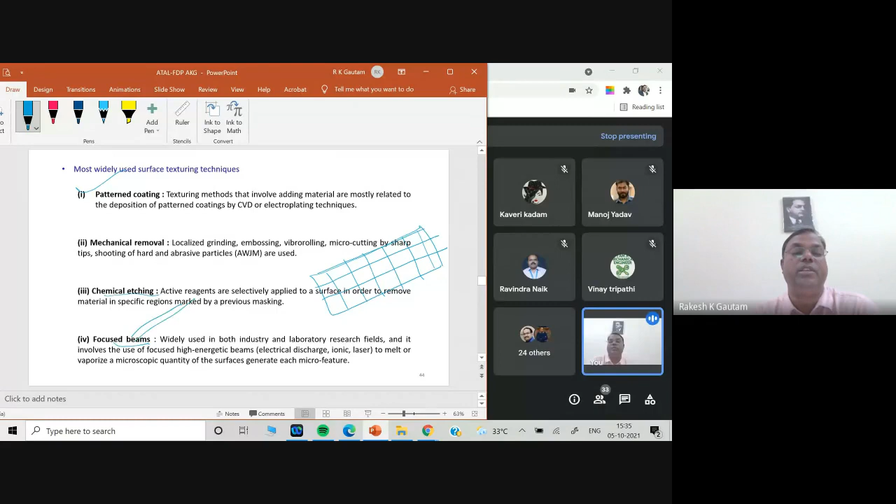So there's mechanical removal, chemical etching using some kind of chemicals, and focused beam - laser beam is being used very widely nowadays. So laser surface texturing, we call it LST. This is used very widely nowadays.

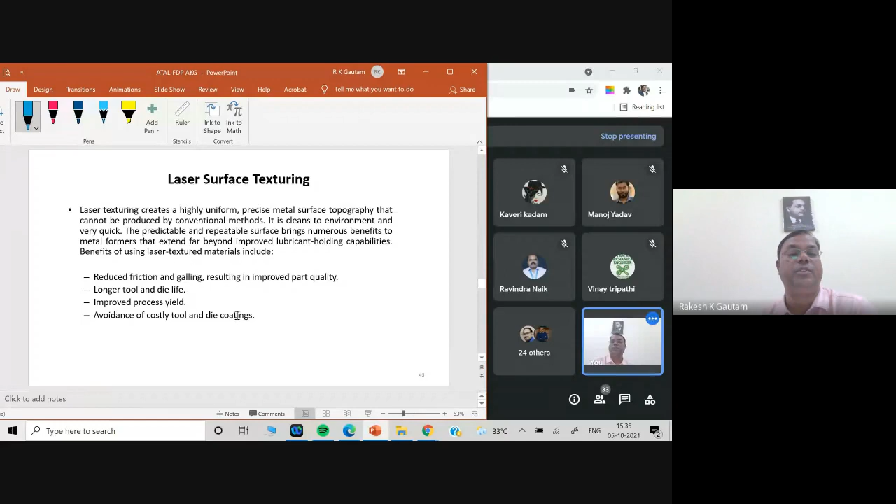This reduces friction and galling, gives longer tool life and die life, and improves process yield. So all these are texturing applications in metal forming. How is this texturing used? This is a very vast topic, but I'm not going to cover it in great depth - just a superficial introduction for your interest, on how this texturing is used in the manufacturing process of metal forming.

So just see over here - how surface depositions of dry lubricant on metal sheets, and depositions of low friction anti-sticking wear resistant coatings are done through PVD, CVD, and polymer based coating. So on the sheet metal, we can make a coating.

Here there are two things - we have an alternative. Either we can coat our workpiece, or we can coat our tool. Which will be more economical? If we do coating here on the surface, the surface has a very large area. Coating is a costlier process - not very costly, but CVD, PVD, physical vapor deposition and chemical vapor deposition do involve some cost.

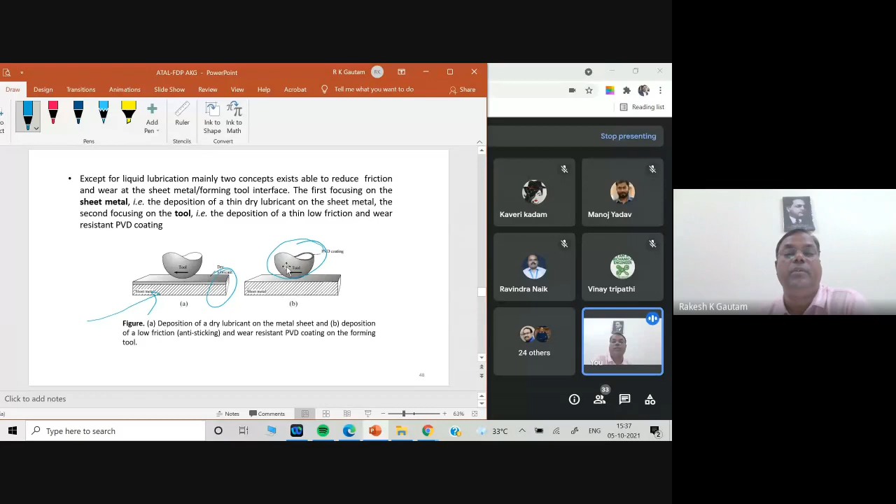So just see, if we rub our tool against this one - one option is to make the coating over the surface of the workpiece, and another is to coat over the tool. So we will observe how they make such kinds of patterns, and here it will make like such kinds of.

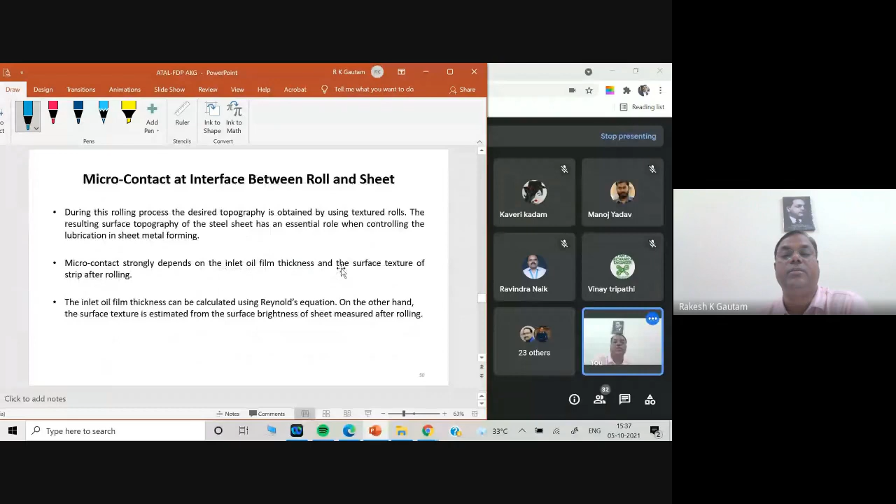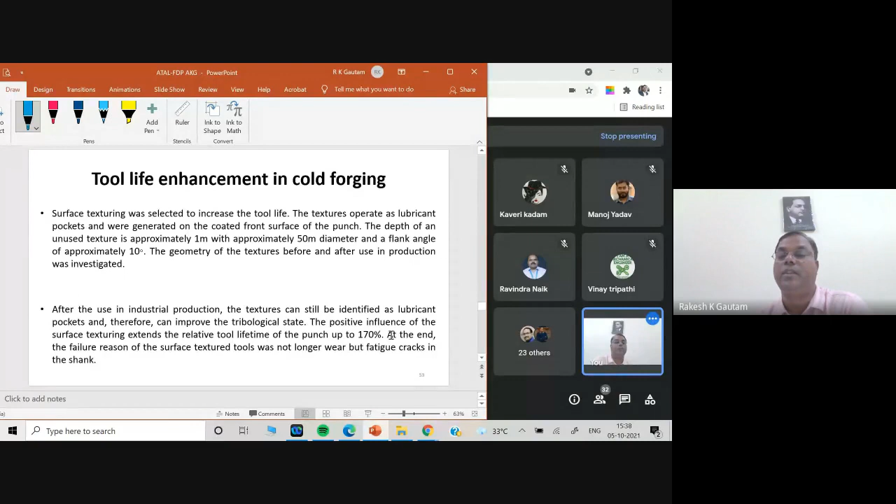Similarly, we can see the example of tool life enhancement in cold forging. You are all very much familiar that cold forging generates a lot of distortion and sometimes cracks over the surfaces. So how can this be controlled? It is a very good control - you can see the positive influence of surface texturing extends the relative tool lifetime of the punch up to 170%, just by texturing. So for this case, it is a very good technology.

Only by changing the surface. Earlier also piston was used, earlier also cylinder was used, but what was happening? We were not making any kind of pattern over the surface - just changing the honing, whatever kind of machining we can do, the cylinder liner is produced. This is done by laser honing. So a lot of techniques are there - laser texturing, laser honing is possible.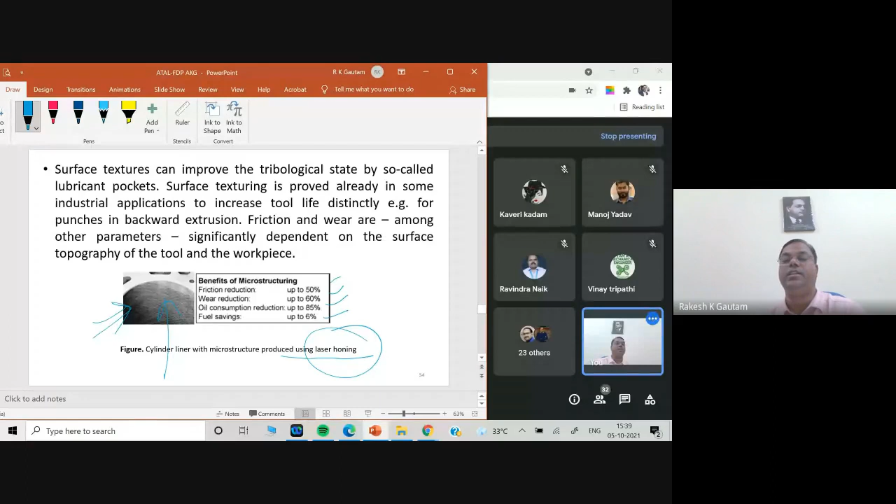So just we can see the effect - here we can see the laser texturing, and here we can say these pockets. These pockets mean this surface, and this surface we are calling the apex, and this we are calling the valley. So some material has the property like this one - this valley can retain oil naturally. If this doesn't happen, then we have to make this artificial pattern.

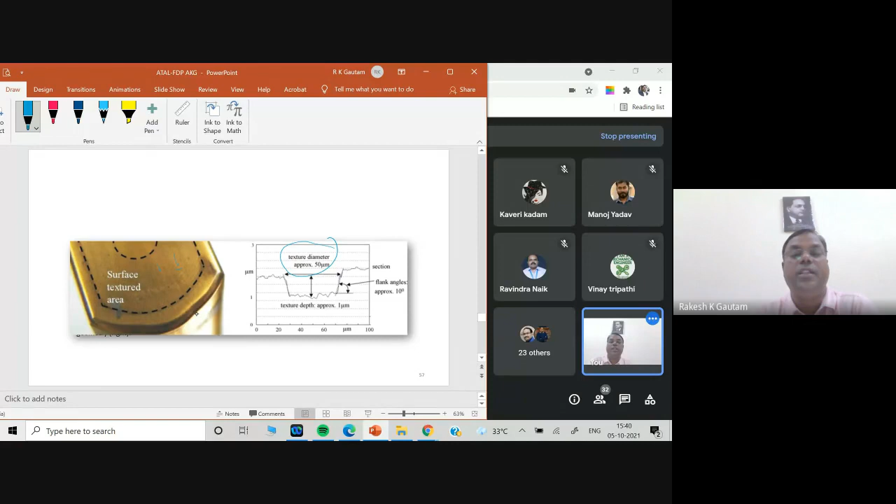So there is a beautiful pattern made by the laser - we have to make a beautiful pattern so this can sustain or retain the oil. Here we can see the surface textured area - on this gold we have to make a very good pattern of texturing. So what do we have to observe over here? We will see the texture diameter approximately - this beautiful pattern. So this we can see in the texture pattern - this is the section, flank angle, and the texture depth. This can retain very good properties - oil property or any other property can be sustained.

So this one - tool life enhancement in hot forging. What challenge does hot forging have? Because at very high temperature, they cannot use any kind of oil. So what can we do? We cannot use oil as a lubricant in case of hot forging. So in that case, what is the solution? Self lubricant or some kind of material we can use.

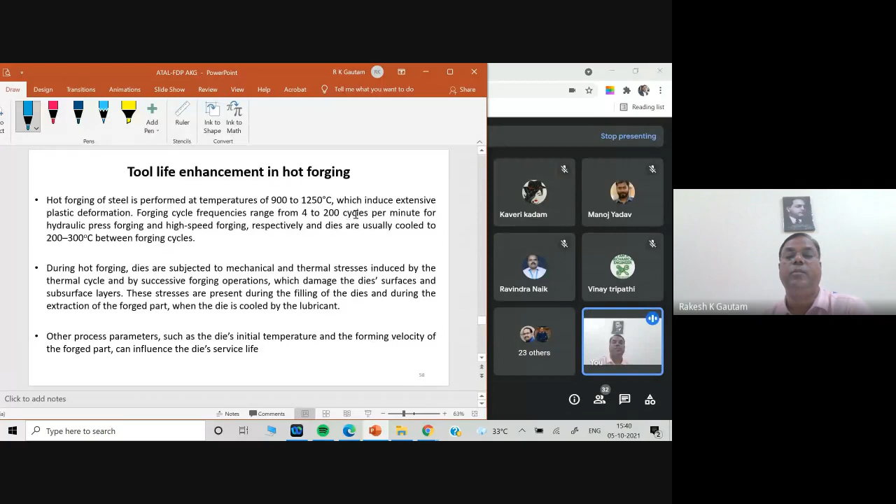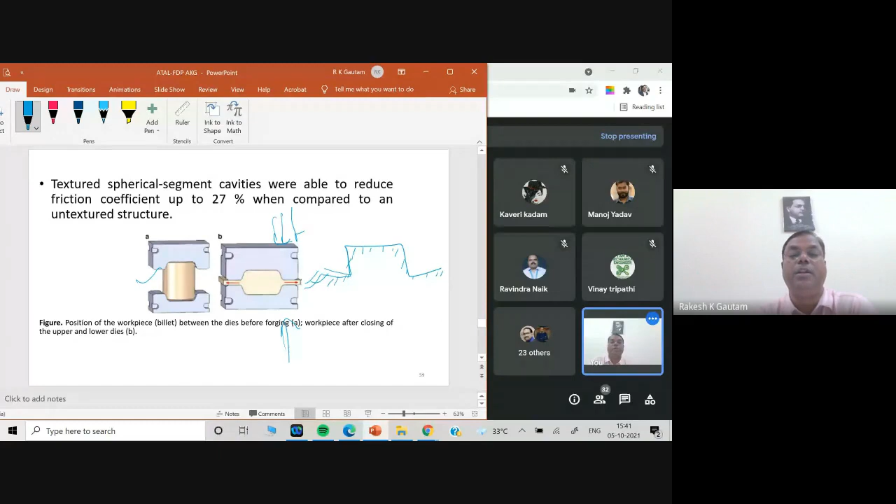Otherwise here it slips, sometimes it slips. So sometimes what needs to be done? The slip happens because of the solid lubricant. And due to this slip, it cannot be reduced as required by a single force. So what do we have to do? We have to repeat the force multiple times. But once we make a single pattern over the surface...

This surface - on this surface the material can be inserted. So what have they made here? Just on this surface they make a pattern - a beautiful texturing. In that texture, what happens? It works like a grip - if you get this grip, then it can make a very good impact. So they can reduce more area in a single stroke. So these are all very beautiful examples of texturing.

So we can see over here, the frictional coefficient is reduced by 27%.

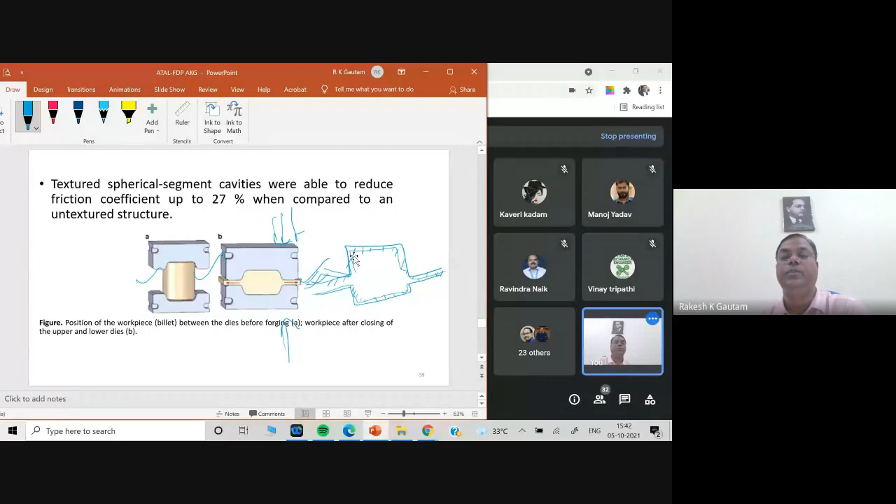In this, what happens is we have reduced the area, and the coefficient of friction among this can also be reduced by 27%. So all these are areas still to be explored.

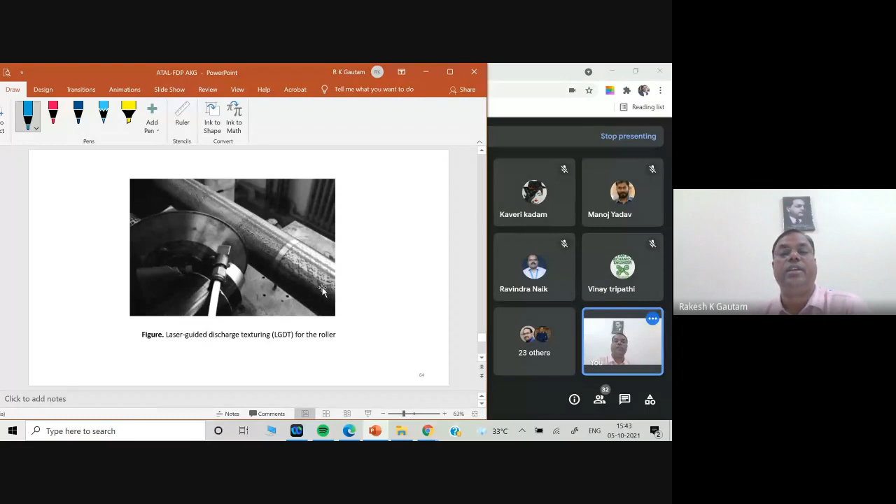So we can make different patterns of texturing over different ranges of the surface, so they have to make very good properties of oil retaining. So just we can see over here, this textured surface of this diameter and common discharge, and this is laser guided.

What happens in laser guided? Laser guided is one of the new techniques. So here we can see, the number of pockets is very less, but here the number of pockets is very more. The more number of pockets there are, the greater the oil retaining property will be, and some other surface properties will also be more.

So these are the ways by which we can make the beautiful texturing pattern. So, here we can see tool life enhancement by deep drawing.

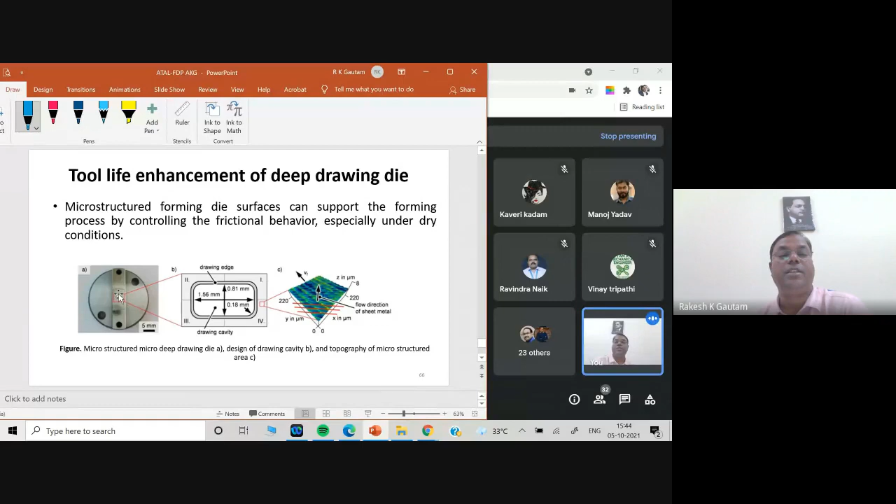What is deep drawing? Deep drawing is one of the causes. This can be done for nano kinds of shapes, nano kinds of structures. All these are micro, but we can also develop nano. This was not possible previously, but by using this texturing technique, we can do deep drawing of such small holes or small elements. So this is the micro size, and we can also generate the major size.

So what is the reason? It cannot be fused by this one. Here we can see, once we are not using the texturing, it may get fused from the surfaces, at a very small 0.05 millimeter level. So that is deep drawing, and it can also be non-fused by using texturing.

Okay, so that's all about the basics of the structure. It's also already 45 minutes, and we have another meeting at 4 o'clock. So if you have queries, you can ask me, otherwise thank you very much.

So Namrata, if the audience has any questions... Yes sir, thank you very much sir. Query, please ask. Okay, if you desire to ask any question at any time, it is most welcome, otherwise anybody is free to contact me at any time. My information is available on the website, but I would like to take one or two questions by conversation. Manoj Yadav, is there... Manoj? Kaveri Kadam, are you there? If you will not ask the question, I will ask the question. Is it okay? Ravindra Naik, can you hear me?